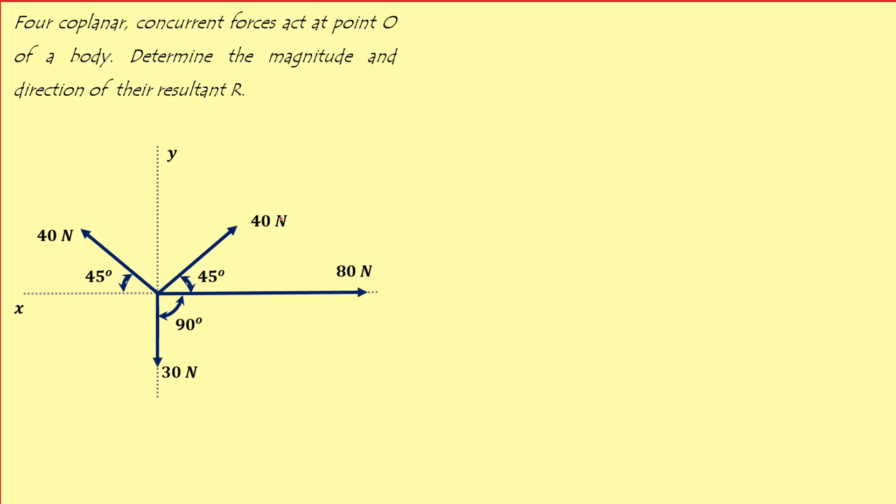Today we will discuss a very important terminology in engineering mechanics, that is composition of forces. So what is meant by composition of forces? That we already saw in the previous video. Composition of forces is the addition of multiple forces to get its equivalent force, which is known as a resultant. So this composition of forces is

three different methods. First is the parallelogram law of force addition, then the triangle law of force addition, and the polygon law of force addition. So in a previous lecture, we have already seen the parallelogram law and the triangle law, which are very useful to determine the resultant if we have two forces. They are also useful if we have more than two forces, but the method is a little bit complicated and tedious.

So to overcome that drawback, we have polygon law, which states that if a number of coplanar concurrent forces acting simultaneously on a body are represented in magnitude and direction by the sides of a polygon taken in order, then their resultant may be represented in magnitude and direction by the closing side of a polygon taken in tail of first vector to the head of last vector order.

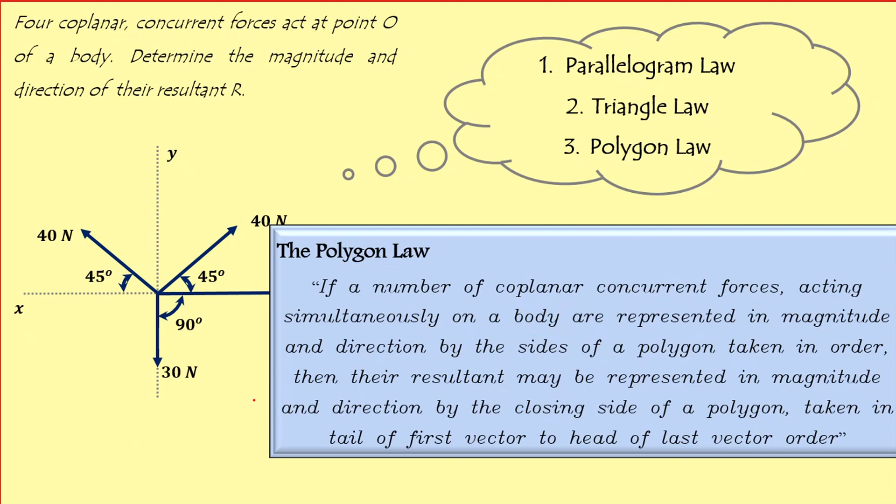Let's solve this. Let's use this polygon law to solve the resultant of this problem. So in this problem we have four vectors acting in different quadrants, different directions, and they all are concurrent forces acting on a point O. So the lines of action of all these four forces are passing through a common point, and our objective is to determine resultant R by using this graphical method which is known as a polygon.

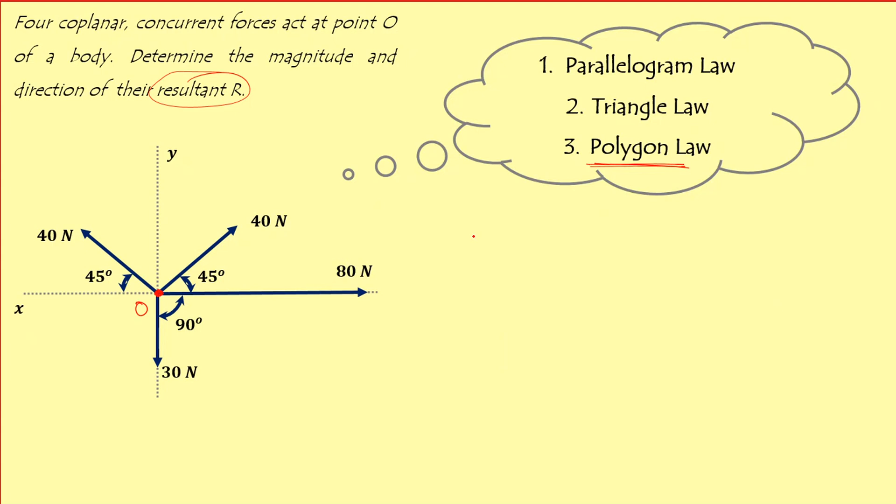So to determine the resultant of these four vectors, we are using a graphical approach which is stated by the polygon law of force addition. So here again I'm using a graph paper with a unit dimension, and the first step is to define a suitable scale. Because the unit of force is a Newton, and for the drawing we need to consider a proper scale of mm, centimeter or a meter.

So with a suitable scale, start with the origin O. Consider any one vector in this sequence. I am considering 80 Newton as my first vector to draw or to start a polygon. So this 80 Newton vector will be one side of a polygon. So this is the 80 Newton force and it is right now acting as one side of a polygon.

Then I am considering this 40 Newton force which is acting in the first quadrant. So I am considering it as the second force in the order, at 45 degrees with respect to the x-axis, and its magnitude is 40 Newton. We need to draw a temporary x and y axis to draw the next vector, which is again a 40 Newton force acting at 45 degrees but in the second quadrant.

So this is 40 Newton at 45 degrees with appropriate scale, and the last force in our sequence is 30 Newton, purely vertical. So right now, as per the statement of polygon law, I have drawn all these four vectors as the four sides of a polygon, and as per the polygon law of force addition, the closing side becomes the resultant, and this angle is the angle of inclination of the resultant.

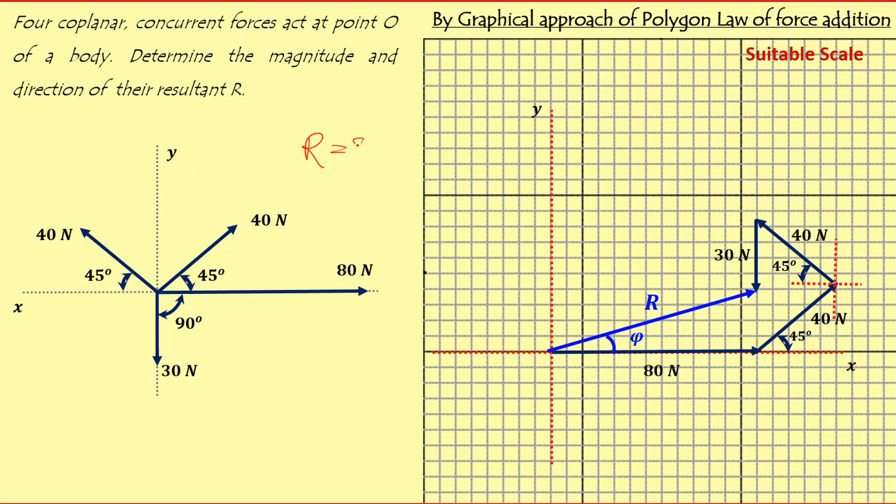So the magnitude of R we can easily measure from the diagram, then simply multiply it by the scale and you will get the value of resultant R. It will come out as R equal to 84.3 Newton. Similarly, with the protractor, measure this angle phi, and you will get phi as approximately 18.37 degrees.

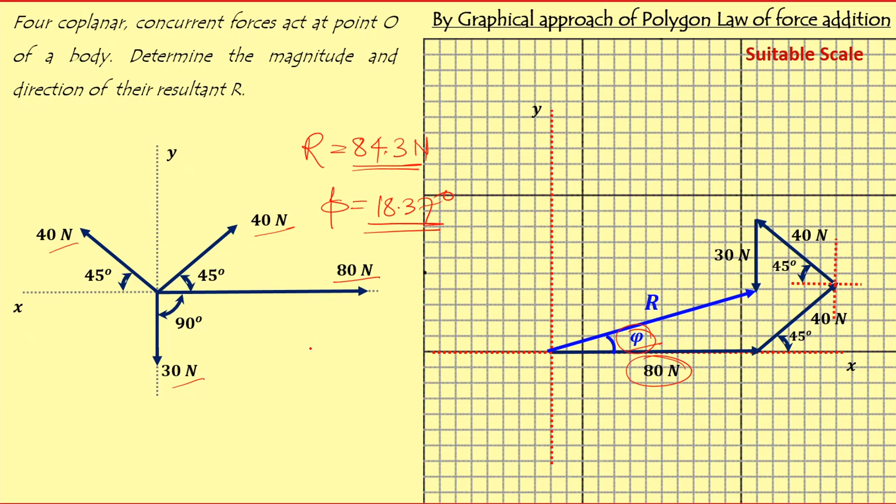So at this stage, one question comes: whether this sequence is important, meaning I considered 80 Newton as the first force, then 40 Newton, then 40 Newton, and then 30 Newton. Is this sequence mandatory? Absolutely not. You can use any sequence. Let's understand it. This is the problem we already drew with that sequence, and this is the resultant R, and this is phi.

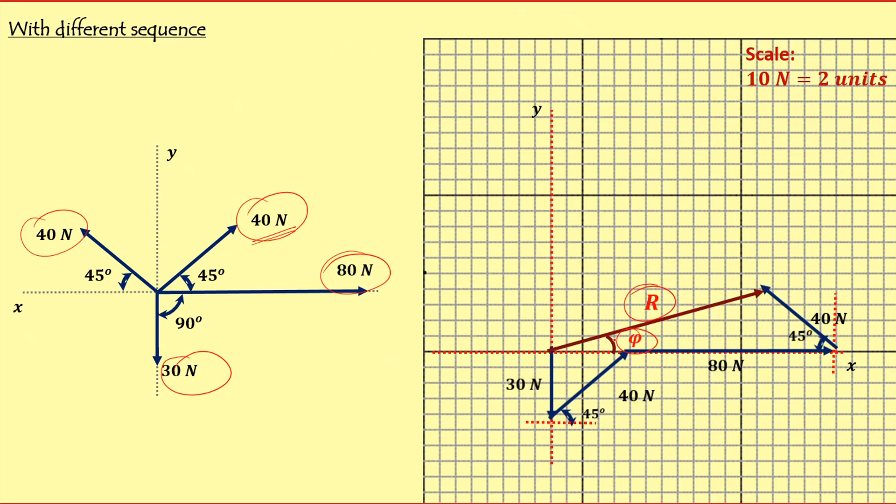So in the next sequence, I'm considering 30 Newton as my first vector, drawn with the temporary x and y axis. Now I'm considering this 40 Newton, acting in the first quadrant, as my second force. Then 80 Newton as the third force, and finally the 40 Newton acting in the second quadrant. Here you can observe that R and phi remain the same, though we have changed the sequence.

One more time, let's change the sequence again. Now I'm considering this 40 Newton as my first force, then 80 Newton as the second force, then 30 Newton as the third force, and the 40 Newton acting in the first quadrant as the last force. And still, the resultant R and phi remain the same; their values are completely unchanged. So you can state that the sequence of the forces is not at all mandatory to determine the resultant.

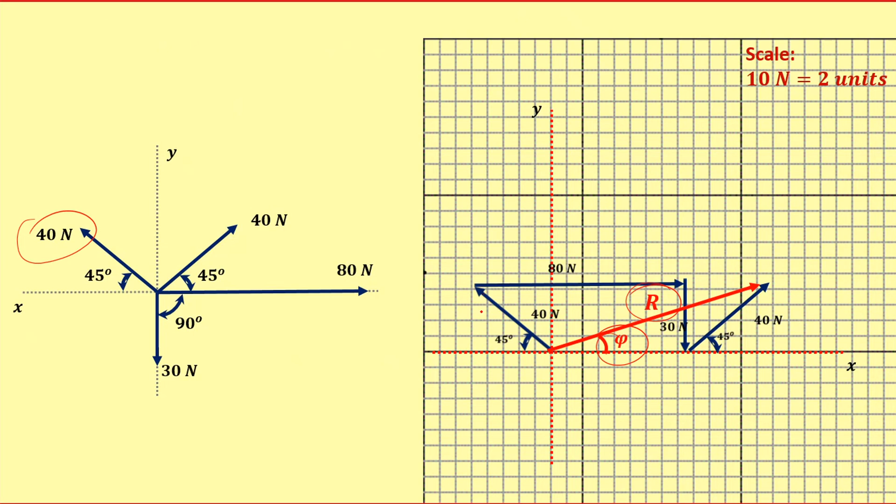But the polygon law has one drawback: this graphical approach is very difficult if the number of forces is large. For example, with 10, 15 or 20 forces in the system, it is quite difficult to get the resultant. So we have another approach to overcome this drawback, known as the rectangular force system, which we will see in the next video. I hope you understand the concept behind the polygon law of force addition.